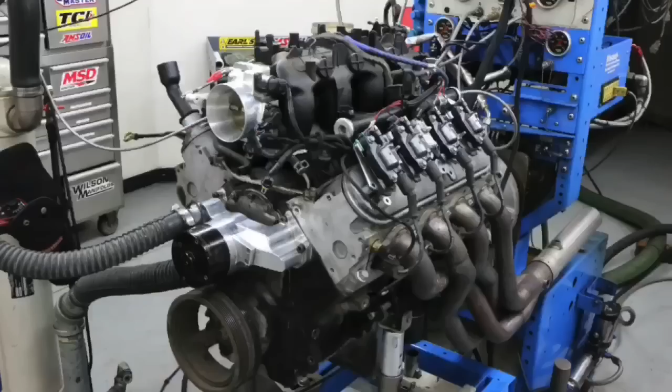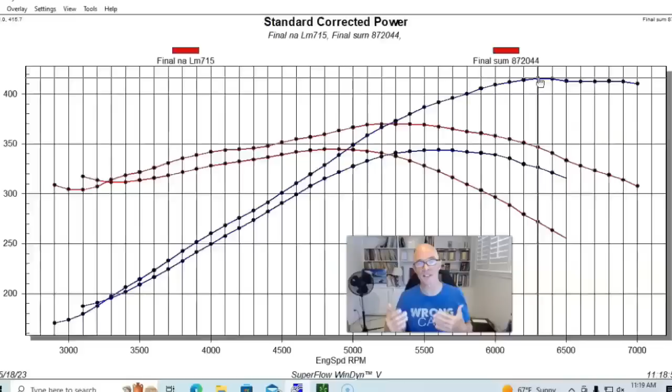Today we're going to look at a whole bunch of different cams, and by whole bunch I mean like 4 of them - the stock one and 3 other performance cams, including one or maybe more that is the wrong cam. The question today is not what do these cams do, we're going to take a look at that as always, but what happens if I do choose the wrong cam for my 4.8 liter?

What else can I do, short of swapping in another cam, to really make it run right? You know what I'm talking about - converters, gearing, shift points. What can I do when I choose the wrong cam?

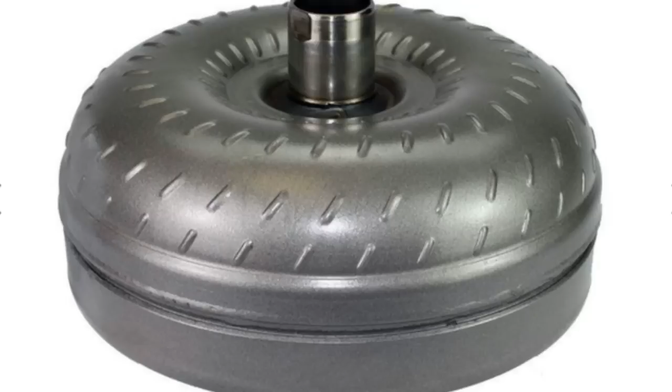Okay guys, let's jump right in and find out what happens if you were to maybe pick the wrong cam for your application, and what can we adjust to maybe make it work if you're going to take this car to the drag strip. We could adjust things like the stall speed of the converter, maybe your shift points, maybe gearing or tire size, those kinds of things. So we're going to talk about that a little bit and find out what you might be able to change to make your wrong cam work.

But we're going to start off with the right cam, or basically the cam that most everybody would have if they've got a motor in their vehicle that's running, or they've got one from the wrecking yard. This is a 4.8 liter LR4. It had the stock camshaft in it right now.

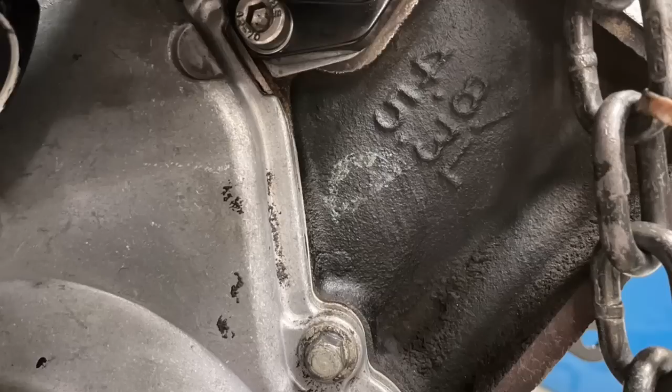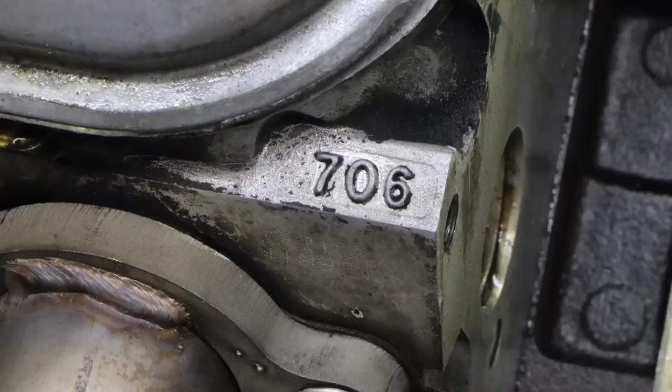In fact, it was all stock with the following exceptions. We've got a 4.8 liter with the stock block, stock crank, stock rods. Pistons - it had JE forged pistons in it because we'd hurt them a long time ago, and this one had a small dome in them, so the compression was about a half a point higher than stock. We had our stock 706 heads, stock valves and everything, no porting, but they did have a valve spring upgrade because later on we would be obviously trying different camshafts, so we wanted to go ahead and put the springs in so they would be ready when we did our cam swaps. Stock rockers and push rods and all that.

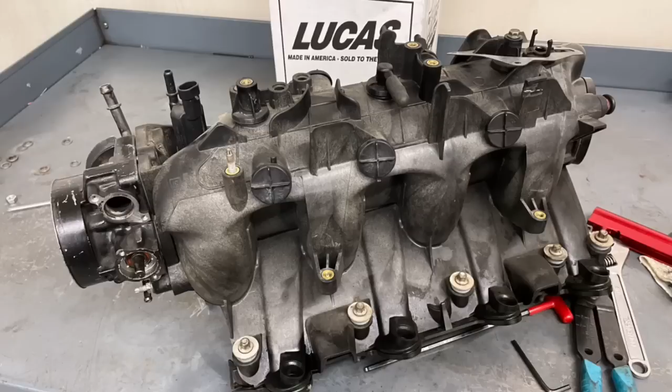Stock intake manifold, throttle body, we did have long tube headers on it. We had 80-pound Excel injectors in it, again, because later on we would be running boost. But we had the long tube headers and a Holley HP management system so that we could dial in each one of the combinations and optimize the power output.

So starting out with our stock LR4 camshaft, our LR4 4.8 liter produced 344 horsepower and 345 foot-pounds of torque. The 344 horsepower came at 5,600 RPM, and the 345 foot-pounds of torque came at 4,800 RPM.

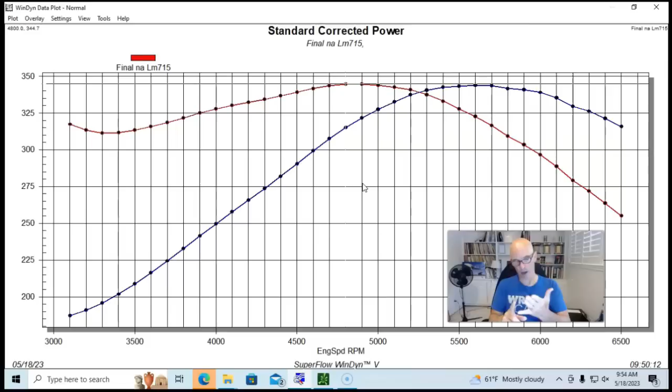So now let's take a look and see what happens if you were to take this to the track. You might try the following things - you might try power braking it, might try flashing the converter, whatever this thing is in, whether it's in a truck or a car or whatever. And you might try different shift points.

So we revved this thing out to 6,500 RPM, even though that's on the downside of the curve. We made peak power at 5,600. We revved it to 6,500.

If you're going to the track and you're trying to maximize, get the lowest ET and the highest mile an hour, what you're going to want to do is run in the RPM range that gives you the highest average power. So in this case, you're going to definitely shift past the power peak and then have it drop back and then come up the power peak and on the downside of the power peak, because that's going to give you the highest average power. Basically, if you just cut off the top side of the curve for whatever the RPM range is for your particular gearing, that's going to be kind of what you want to do.

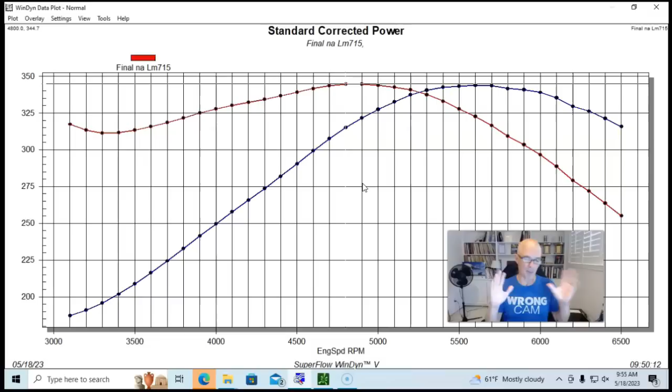And then obviously you're going to want to get a good 60-foot time and all that stuff. But in terms of power production, that's what we're looking at.

But now what happens when we change our camshaft? The first one we're going to look at is something fairly mild. This is a torque cam from Brian Tooley Racing, and I'll go ahead and put the specs up here. Fairly mild, 202 duration kind of thing. So I'll go ahead and put the specs up here and you can take a look at that.

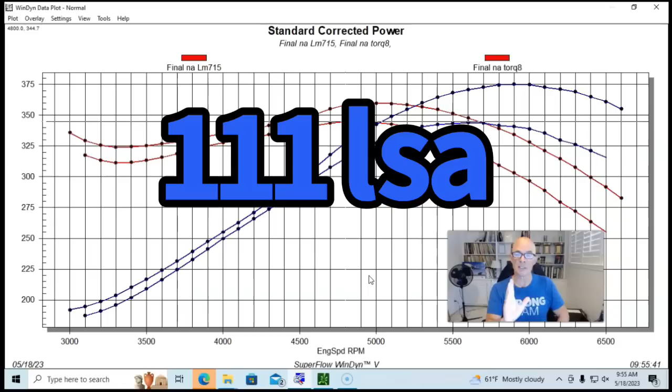But in terms of things that you might want to adjust, this is probably not the wrong cam. This is actually a fairly good cam as a minor upgrade, certainly for a truck or even kind of a performance deal. The torque cam improved the power output by a little over 30 horsepower.

We went from 344 to 375. Peak torque went from 345 up to 360 foot-pounds. And the nice thing is the torque cam basically just gained power almost everywhere from 3,000 all the way up, even down at 2,500 where we would start being concerned about the torque converter.

The torque cam is going to make as much torque as the stock cam does, and maybe a touch more. So we're not going to lose anything there. You could certainly still use the stock converter for that.

More converter will almost always help. As long as you have the traction, it'll just put you up in a higher RPM range where the thing is making more power. A lot of times that will improve 60-foot time.

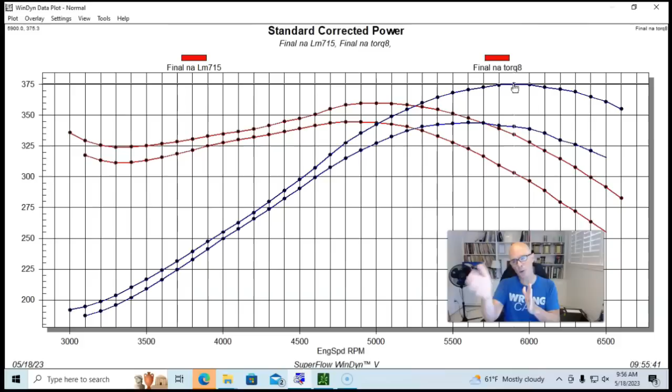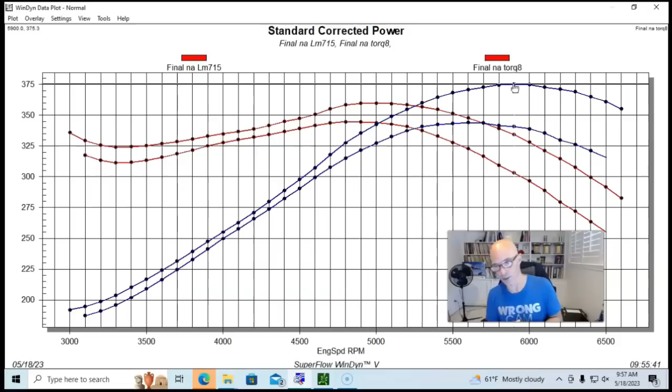For this one, we're making peak power out at 5,900 RPM, so we've shifted that by 300 RPM. If you're using this cam, you might also want to shift your shift points. Again, we rev this one out to 6,600 RPM, so you might want to adjust your shift points a little bit higher so you can get the best average amount of power for each shift point. Once you've played with that, you're probably going to show an extra 30 horsepower, and good average power production is going to improve your ET.

But now let's take a look at another cam where we actually have to sacrifice power bottom to top. Our choices with the Brian Tooley Racing Torque Cam were very easy - we just kind of keep everything the same, make more power everywhere, and away we go. But let's take a look now at a camshaft where some trade-offs are necessary.

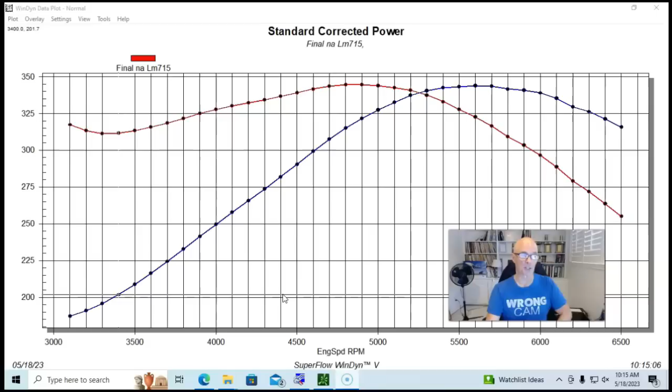And it looks like from the change in power, we're probably going to have to throw the kitchen sink at this one. So this is our combination with our stock cam, the 5.3 liter. Here is an LS9 camshaft, a factory LS9 camshaft.

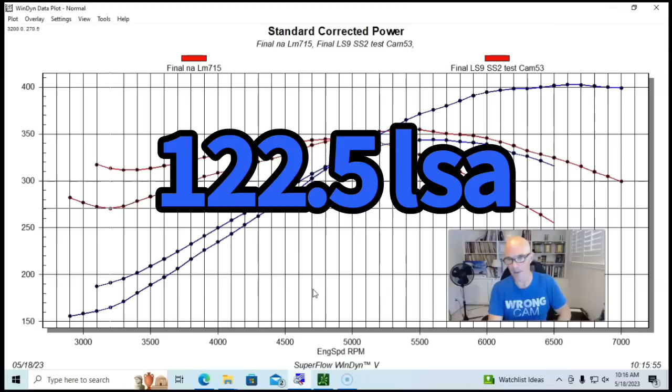You'll see right off the bat, all the fans of the LS9, yeah, we're making lots of power. It's the most powerful factory camshaft, and it probably is that, along with the LS7. When I tested them, especially on a 5.3, they both essentially made the same power. So they're both powerful cams, but they're also both very, very soft down low.

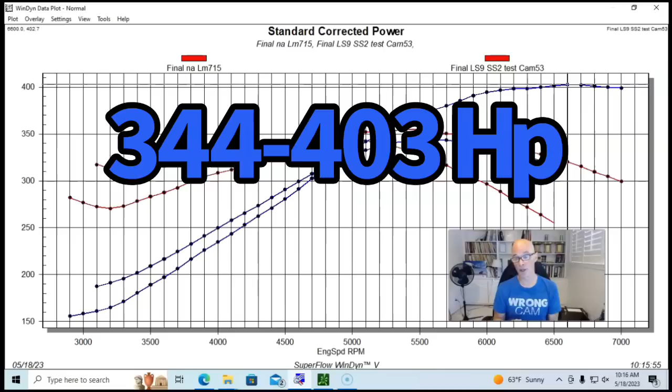So let's look at the good side of this thing. The LS9 camshaft increased power from 344 horsepower up to 403 horsepower. Big gains. As you can see, we're revving this thing out beyond 6,500 RPM. We revved it all the way out to 7,000, where this thing was still making 400, right at 400 horsepower. So it's still doing well.

But it's only doing better than the stock cam, the stock LM7 cam, above 4,900 RPM. And that's going to be a problem for two different areas. One, obviously the launch - we're going to have to be in the lower part of the curve when we launch this thing in first gear.

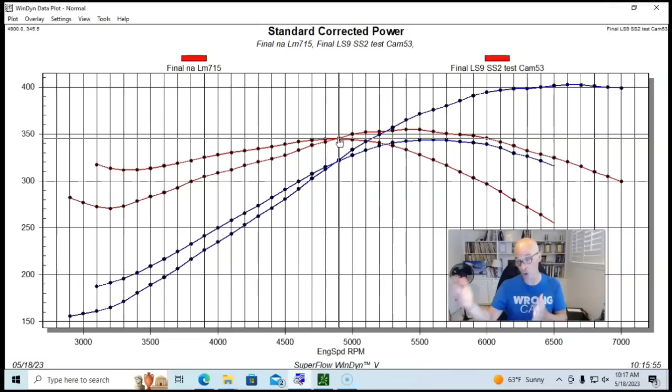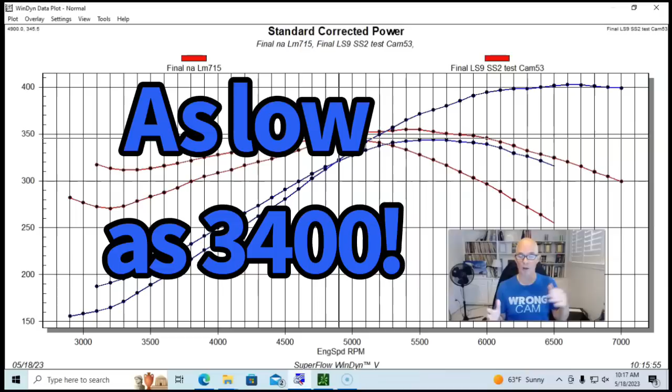The other thing that could happen, depending on your gearing - and I'm going to have a video coming up about how to choose your shift points and gearing, a whole video with all the math involved and how you pick your shift points. But if we look at this and shift at 6,500, in some of the gears it's obviously going to drop down into the range where we've lost a bunch of torque. Even if we shift at 7,000, we're still going to have drops into the area where we're losing torque. That's why we're going to raise the shift point beyond 7,000 RPM.

But down in first gear, we still have to deal with getting this thing going up into the high RPM where we can take advantage of the extra power offered by this LS9 camshaft. And the way we're going to do that is two things. We've already changed shift points. Now we're going to throw the rest of the kitchen sink at it, and that's going to include converter and gearing.

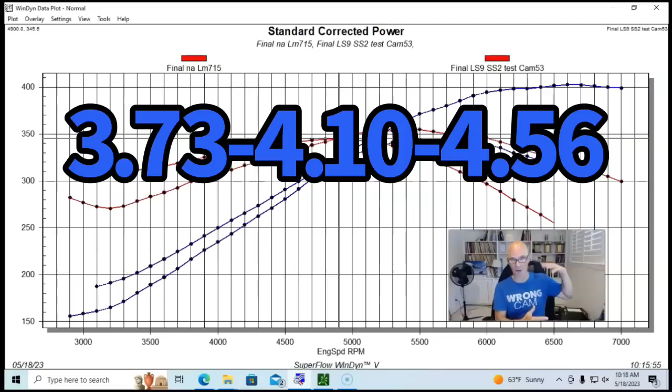Because we're wanting to run lots of RPM, gearing is definitely going to be our friend with a small motor and lots of RPM. So depending on what gearing you have, you're going to step up from a 3 series gear to a 4 series gear, even a mid 4 series gear, to get this thing moving and running in the RPM range that we want. Obviously you're going to have to take into account your gearing, your end miles per hour, your tire size - all the math associated with it. Like I said, I've got a video coming up on that.

But the other thing that's going to be really critical for getting this wrong cam actually working is a converter. Going from a stock converter, which is 1,800 to 2,000 RPM, to a typical 2,500 RPM performance converter, I don't think is going to get the job done. For this LS9 camshaft in a 4.8, I would go up higher - and again, your choice of converter is going to come down to: is this a drag race car that I'm not driving a lot? Is it a street car that I'm occasionally drag racing? That's going to dictate your converter.

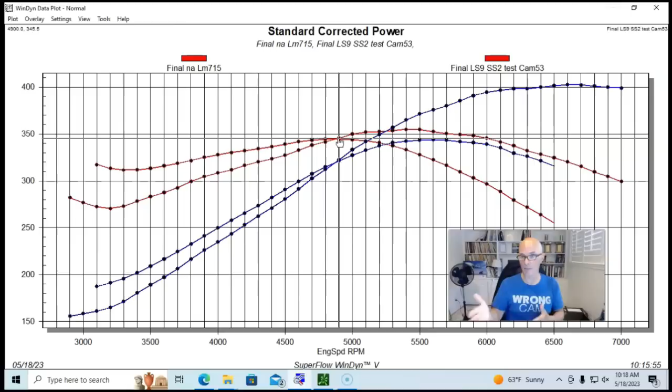If this were a car that I was taking to the track and I wanted it to run boost or nitrous, I'd go way past the 3,000 RPM range, out near a 3,500 stall converter, because it's making less torque even at 3,500 than the stock cam did. So the stall speed may not actually be what you think it is or what the advertised number is, because we're making such little torque. I wouldn't be afraid of a 3,500 or even slightly more stall speed converter for this little 4.8, so we could get the RPM up and take advantage of the added power that the cam has to offer.

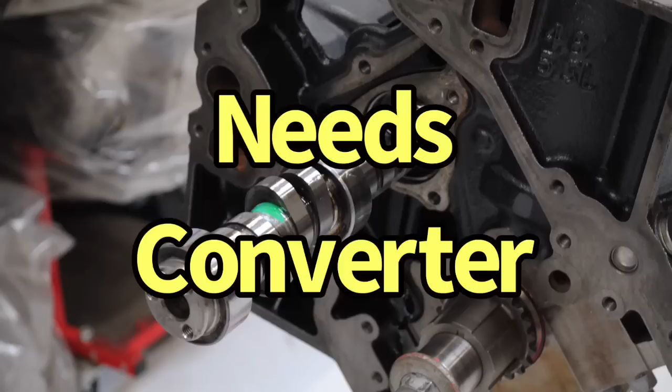Now let's take a look at a camshaft where maybe it's between these two. It's not as big of a trade-off, but still makes a lot more power.

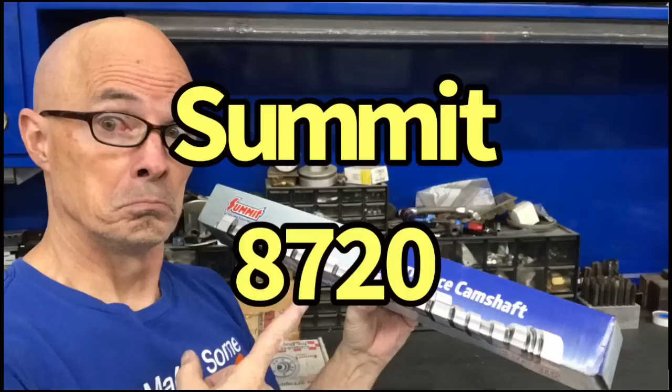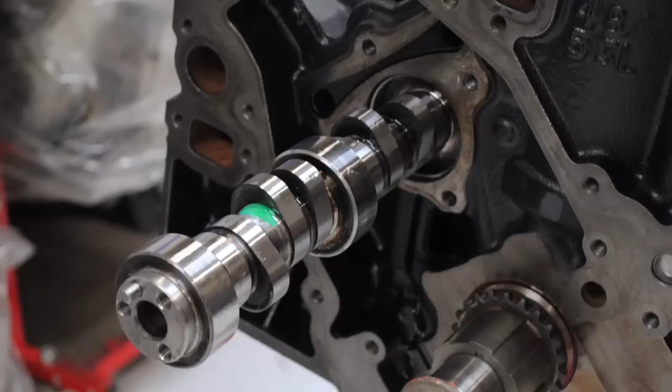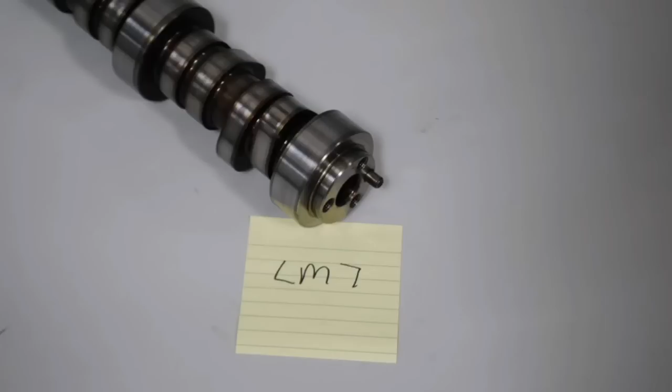Okay guys, we've taken a look at our stock camshaft versus the mild torque cam from Brian Tooley, and then versus the LS9 camshaft, the factory high-performance cam, which made a lot more power on top but made it softer down low. Now let's take a look at an aftermarket camshaft. This one came from the guys at Summit Racing, one of their Pro LS cams, part number 8720, and I'll put the specs up here. It's not a really big cam, fairly mild, like a stage 1 or 1.5, somewhere in that range if you like naming cams by stages. But it's a good cam, and it's the camshaft I ran back when we did our Sloppy Stage 2 versus the world to see how these comparable cams fared, and they all did pretty well in that test. But let's see how the Summit cam fares versus our stock LM7 or LR4 camshaft.

Here is the Summit camshaft, and as you can see right off the bat, it did make a lot more power. It went from 344 horsepower to 416 horsepower. Like the LS9 camshaft, we also ran this thing out to 7,000 RPM, and in this case it was still making 410 horsepower at 7,000 RPM.

What that would mean in an actual application, if you were trying to optimize miles per hour and ET at the drag strip with your transmission, you're going to want to shift this past 7,000 RPM. Even with a mild camshaft like the Summit cam, in a 4.8, because the motors are smaller, they're going to want to rev. This is a perfect example of why you have to choose your springs properly, because you're going to want to shift past 7,000 RPM going down the quarter mile. And obviously, because we're running it out past 7,000 RPM, gearing probably would help this thing, just like it did with the LS9.

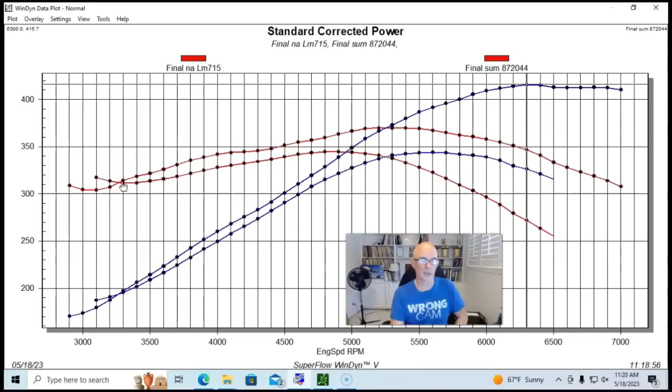But here's the other thing I want you to look at, and this is why I think this kind of aftermarket cam is a better choice than an LS9 -- maybe not from a financial standpoint, because this is certainly going to cost more. But here's what would make the thing a lot more fun on the street and ultimately at the track: this camshaft would be faster than an LS9 in the same vehicle at the track. But if we look here at 3,300 RPM, which is the crossover point where the Summit cam started making more power than the stock camshaft, that tells us that unlike the LS9 camshaft, we can get away with a lower stall speed converter on this combination.

Now, we probably couldn't run a stock stall speed, but we could use something like 3,000, 3,100, or 3,200 RPM, maybe near the crossover point, and we don't have to resort to a 3,500 or 4,000 RPM stall converter.

That being said, if this was ultimately a drag race car and you want to put more stall converter in and run this thing to 7,500, a 3,500 stall speed converter is probably going to make it accelerate harder. But the nice thing is if we can go down in stall speed on our converter, it's going to make the combination a little more drivable, more likely to be a street-strip car with more focus on the street than the strip. So this is kind of a good combination.

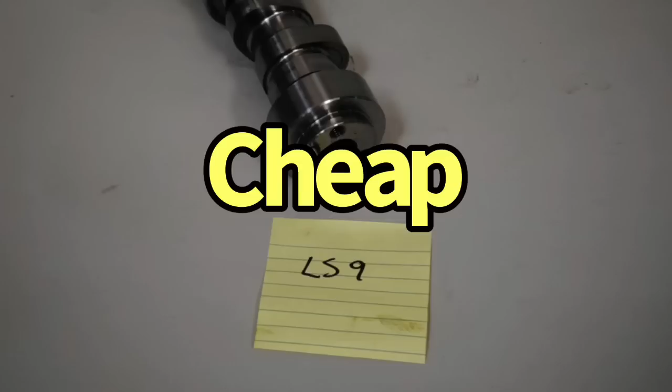This is something you'll see from lots of camshafts, from Brian Tooley or the guys at Summit or Texas Speed -- any kind of camshaft like this, because we tested a bunch of them on this 4.8, they're going to provide the same kind of thing. I know the LS9 camshaft, because it makes pretty good peak power, is desirable for a lot of people, but it's just hard to get past all that loss in low-speed torque.